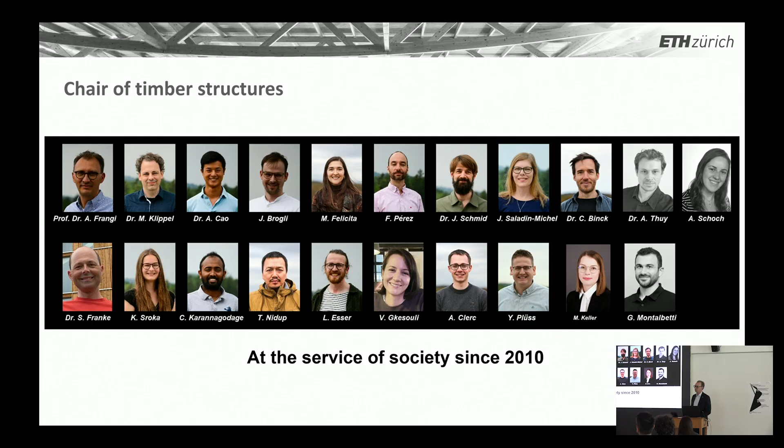I have some time to count the people. We are 21 at the moment, with 12 PhD students, and the chair was founded in 2010. We started with few people, as usual, with 4 people for a PhD student. And you see now in the last year we are around 20 people. So it's already a big group, as you can imagine, with PhD students, postdocs, and support also from some colleagues from Empa. I think it was able until now to manage the group.

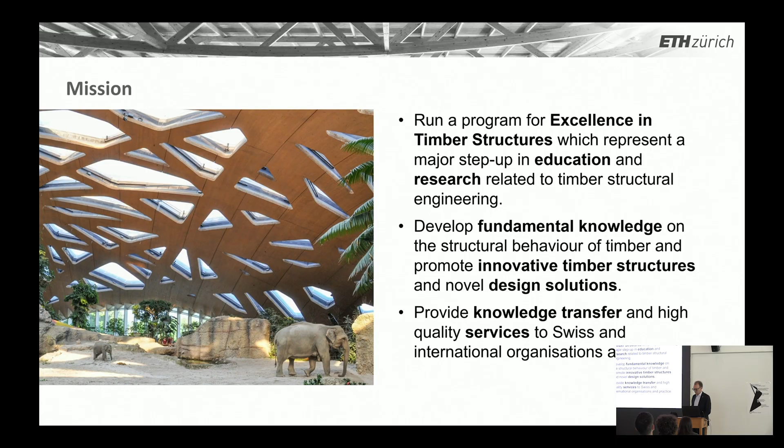I think this also shows timber is becoming important. The mission is very simple, of course: we are at ETH, we want to educate our students for the highest level in timber structural engineering, but of course also to develop fundamental knowledge, more in the basic research, but also innovative structures in the applied research, and also my involvement in standardization. I think it's also important to transfer this knowledge to codes, to standards, and to help the industry with consultancy and solutions.

In education, when I was studying at ETH, going back to 1995, there was only one lecture on timber. Now we are doing at least 3 times more. We teach at the master level at the Department of Civil, Environmental and Geomatics Engineering, offering Timber Structures 1, 2, 3. We also have fire safety and acoustic engineering, which is offered in the Master of Integrated Building Systems. We offer project work, master thesis, and building structures with timber. It's another lecture I'm doing, and maybe you know I'm from Ticino.

I'm happy to still be there 6 times per year at the academy teaching steel and timber structures. I have to say it's difficult to know if this is many or not many. I can tell you when we had 24 master students in one semester, it took 2 full days. But you can imagine, we don't have 300 students, we have maybe 60 students. And if 20 are choosing the master, it's probably because many people say they want to do the master because we are doing timber, so they are really attracted by the material timber.

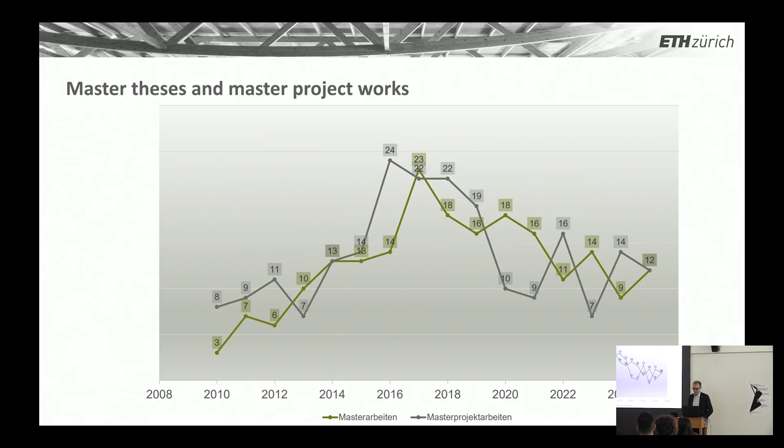During this period there was maybe also the change from Peter Marti to Walter Kaufmann, Fontana, Taras - so this big group became a little smaller, and we profited a little from this particular situation. We have 3 pillars: basic research, applied research, and fire. I will try to go through these 3 pillars and show you what we have done. This is our history - actually, usually for me this is the most important slide, because what I show you is the work of these people, it's not my work.

We were able to finish from 2010 up to now 27 PhD works in different areas. You see the colors showing you in which area - basic research, applied research, and fire safety. Of course, it's nice if some of these students are now professors in some other university.

Most of the other doctors are working in engineering offices. Most of them are here in Zurich. Probably most of them were here during the contact treffen today, trying to recruit possible engineers.

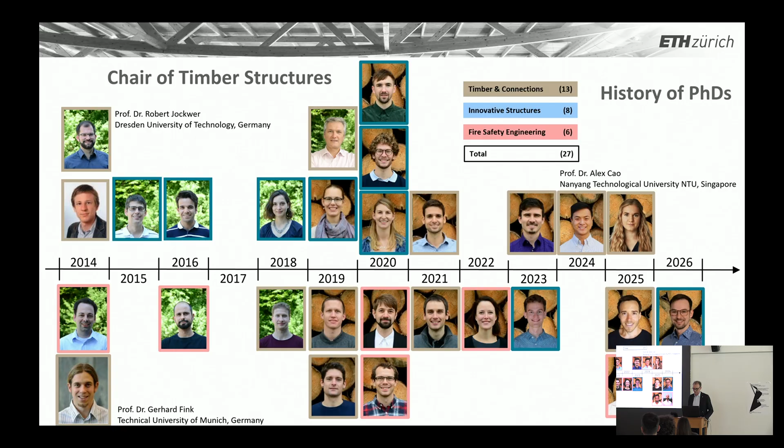Yes, I start with fire safety because, of course, fire safety was the main killer criteria. We were not able to build timber buildings due to the fire safety regulation. This was recognized also by the timber industry.

And now you see Mario Fontana here. He was professor at ETH from 92 to 2019. And he started in 92 what we call the fire safety research at ETH.

Now you see here, I was the second PhD student by Mario Fontana, from 95 to 2001, the first one doing the PhD in the area of fire and timber.

And then there were two PhDs by Mario, and then from here are my PhDs, when I took over the fire safety from Mario. What we have done is just burning - we have tested all possible wall elements, floor elements.

We have done this kind of compartment fire test. This was just important to get the knowledge and to bring the knowledge also to calculation models. And then, of course, to do this together with the industry.

But the most important thing in all this process, the Fire Safety Authority was directly involved. At the end, this was just to build up a trust between industry, authority, and the institute involved.

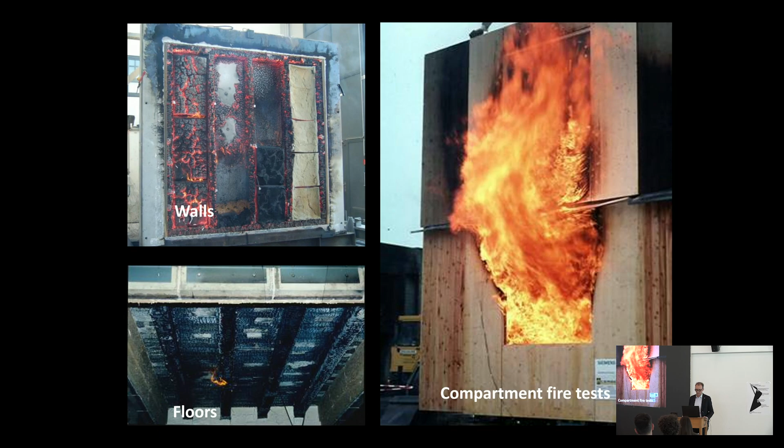And of course we focus on different topics - the topic of what is the influence of the adhesive. Here, this was Michael Klippel's thesis.

Miriam Kleinhenz focused more on the CLT panel with the beam. Pedro Palma - we always have to combine element with connection, the fire resistance of connection.

Reto Fahrni was the first person doing really a code calibration for the new Eurocode for the design of timber in fire. And I mean all this work, not only done here at IBK but worldwide, was very important.

Maybe you know the revolution in the timber industry is dated 1st January 2005, when the new regulation allowed going from 2-story to 6-story buildings. So really going to medium-rise building.

And now with the current regulation from 2015, there are no more limits actually for timber. And for the new one coming in 27, the situation will remain the same. From the fire safety regulation, we have the best one worldwide.

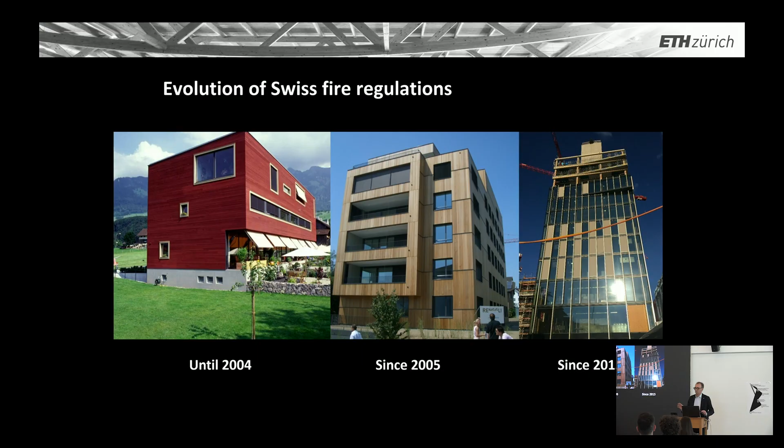You can do what you want, actually. So, but we have to do the right things, of course. But now you see in Switzerland we have 20 years of medium-rise building.

This is really, and it's not the chalet in the mountain, it's also in the city of Zürich, Winterthur, Basel, everywhere - now you see this kind of building.

I think for me, state of the art, honestly this kind of building we should do more or less in hybrid or in timber. It's really what we can do easily.

There are the first crossing timber bridges in Switzerland. And maybe you know that the new dock at the airport will be also done with timber.

So in 2030, when you land in Zurich, let's see what's happened in the next years, but theoretically there will be also a new airport made in timber.

I think actually it is a nice period. But this kind of structure opens also very important questions.

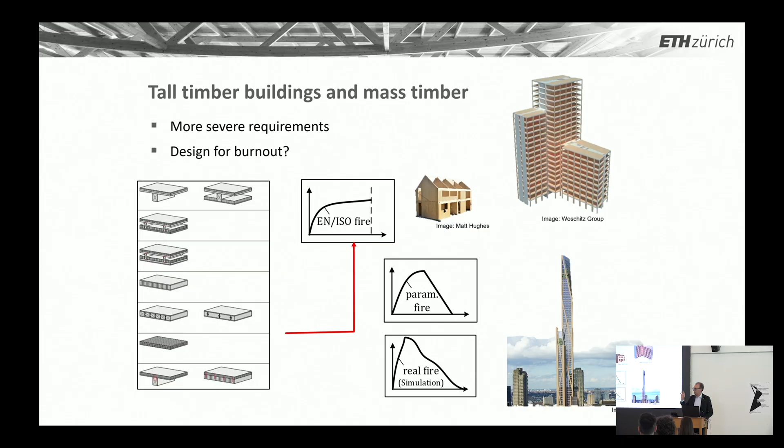Is not anymore the single family house. When we are doing tall buildings with timber, there were important questions about should we really stay with the framework of fire resistance, or do we have to go even a step forward.

And actually already 26 years ago we recognized, when you do a fire test with a compartment where everything is made of timber, in comparison to a compartment where you protect timber with gypsum plasterboard, the photos show that the fire dynamics is completely different.

Here we have much more combustible material. The flaming outside is much higher, is stronger. So of course, everyone knows if I put more combustible material, we change the fire dynamics.

And this is done also now worldwide, many tests asking for maybe new solutions.

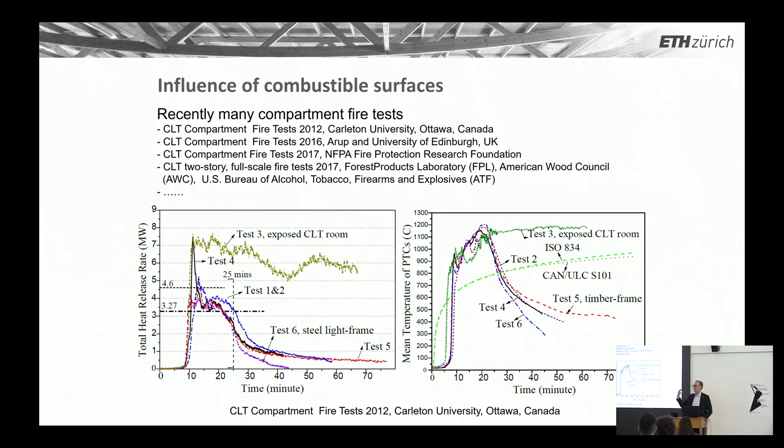And this is now where we are working in the last years, especially with the PhDs of Jochen Schmidt and Fernando, where we focus really on the real fire behavior. We developed this special device.

At the same time, we can play with the most important other parameter, temperature and air - how much air we bring to the timber surface. You know, if you want to accelerate a chimney, you just start blowing air and so on. Air is an important parameter.

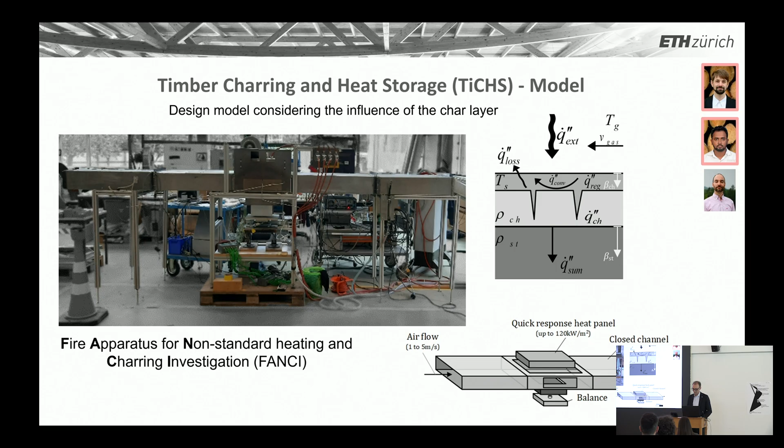Now Jochen Schmidt developed this TiCHS model, the timber charring and heat storage model. It's the first time we have a model able to consider the influence of the additional CLT element, but also the positive influence of the char layer.

Usually we focus on the timber because it's our load-bearing element. But the char layer is so important because it's protecting the timber, and the char layer, you see, is like a battery - it can store heat. This is the reason we are using charring for the barbecue. It takes the heat and gives us the heat over many hours.

Now we want to understand better how much heat we can store in the char. But then there is another issue, also studied by Schmidt: the char is combusted during the fire, especially in the cooling phase. When you introduce fresh air, you start oxidizing, and the char starts disappearing - meaning that in this phase it is storing heat, but later on it is releasing heat.

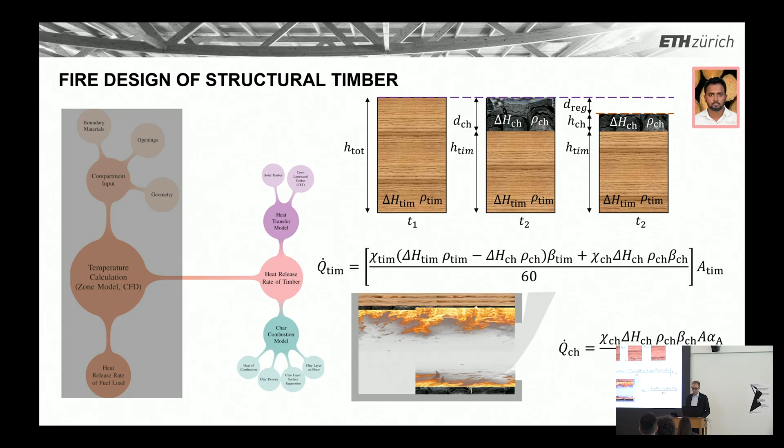So now we have the possibility to model the storage of heat in the char, but also, especially in the cooling phase, the release of heat due to the combustion of the char layer. We also extend the model with the so-called falling off, where the char combusts on the floor and releases more heat, and we are able to estimate this contribution too.

We are lucky that now we have a fantastic device here at ETH, the fire simulator. After the fire lab at EMPA was closed, it was a disaster for us, but we were able to get this new device here at ETH.

It's small, 1 meter by 2 meter, but it's designed so that we can even do this kind of bending test with glulam beam. The most important feature of the fire simulator is that we can simulate any kind of temperature development - this is why we call it a simulator, not a normal furnace - and we can also adjust the oxygen content.

So we can really simulate a real fire: at the beginning, when you have the so-called flashover - everyone knows what flashover is after Crans-Montana - when the whole compartment is burning, usually you don't have any more oxygen. In the cooling phase, we bring more oxygen, and we change the fire dynamics. We can really simulate this kind of real scenario in the fire simulator, so I think we now have the best device to continue the research.

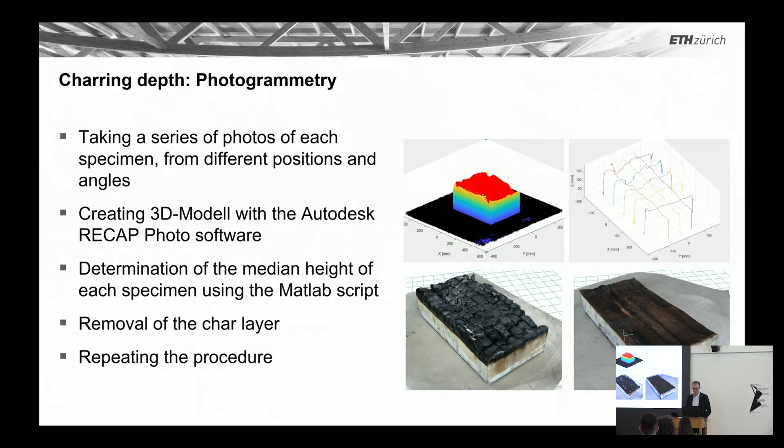And now, with your help, we replace, as far as I know, Photos, Recap, and MATLAB with the Artec Leo 3D software, and you get this kind of image. This is amazing - in my time, I was only able to cut a beam and get maybe 3 cross-sections. Now I have the full picture of the beam, of the plate. You can imagine what we can do nowadays.

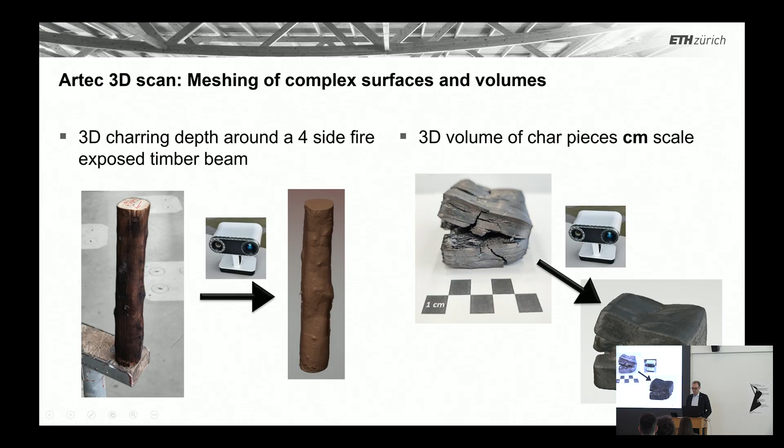Fernando Perez was not only interested in the residual cross-section, he is doing tests with small pieces of char, characterizing the thermal property of the char layer. You cannot believe how accurate this image is compared to reality.

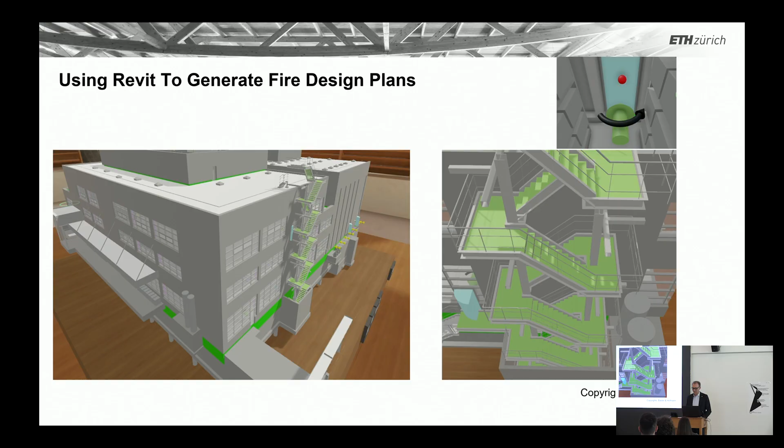Jamit was also helping, but this is more a side project with Bastler Hoffman, using Revit to generate fire design plans. I think this is also the future - to check the fire safety plan, to check the evacuation is now so easy. It's all new for me, but I think it's very fascinating, because you can theoretically simulate and really see if evacuation would work as expected, by drawing to the plan.

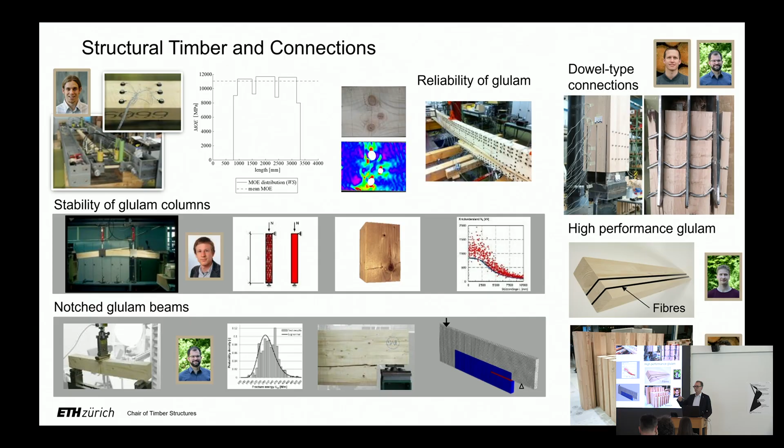Going to the basic research, at the beginning we focused more on glulam. It was more about grading better the material, characterization of the material. There was the topic about stability, the topic about beams with notches, and so on. These are typical basic research topics: improving calculation models, going to SIA standards, Eurocode.

But nowadays we are moving more from designing element by element, beam, column, to this system-based design concept. We consider the whole structure. And for this, we introduce more this scale approach.

So we are looking at the problem going from the material to the system, going through fastener, element, assembly. Of course, for each scale, we try to have a mechanical, physical model. With this model, you can always propagate some uncertainty and connect the different scales.

I think this scale approach is very interesting to understand where we have the problem. Sometimes maybe we are focusing too much on one level and the problem is on another level, or vice versa. And sometimes we are doing something only because we have the instrument, we are strong in this field, but we are neglecting that the problem is at another level. Now we are trying to work in all projects using this scale approach.

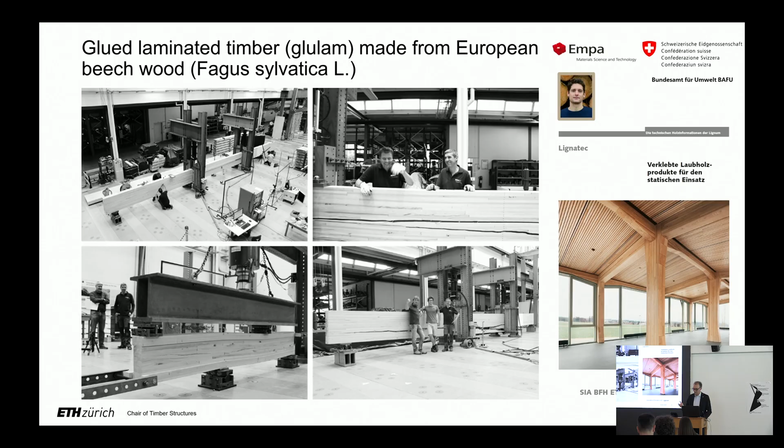Now we are building with softwood, mainly spruce, but we have an increase in hardwood too, especially beech in Switzerland. Some years ago we got funding from BAFU, and we have done a lot of research in hardwood, developing glulam made of beech, also ash, from Ticino even chestnut.

It's always beam and connection, because without connection you cannot do anything. Here you see the typical connection with slotted steel plates and dowels. This connection also works in beech, but we have to design it in a different way.

Then there is our super beech, the LVL, laminated veneer lumber. This product has fantastic properties. It's like our C200 for concrete, or S1000 for steel, because we go from 30 megapascal to 80 megapascal strength.

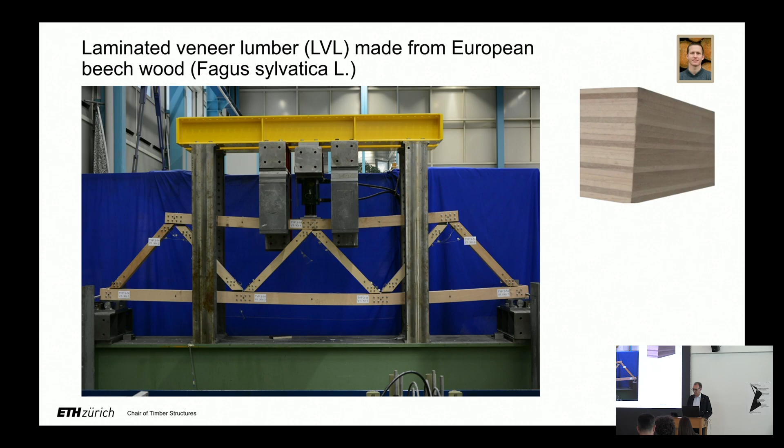And for this material, we have done also some interesting research. We are also trying sometimes to solve the problem of timber as a natural material by introducing fiber. It's always a dilemma. We introduce fiber, yes, we improve something, but maybe we are not so good with other things. But having fiber, you can solve the problem of the knot on the tensile side. The tensile side is not anymore governing.

You can even have a ductile behavior, so a beam which would fail brittle, with fiber is behaving more or less like a steel beam, because then you create the failure first on the compressive side, and timber in compression still gives some ductility. But of course, we have to introduce some fiber.

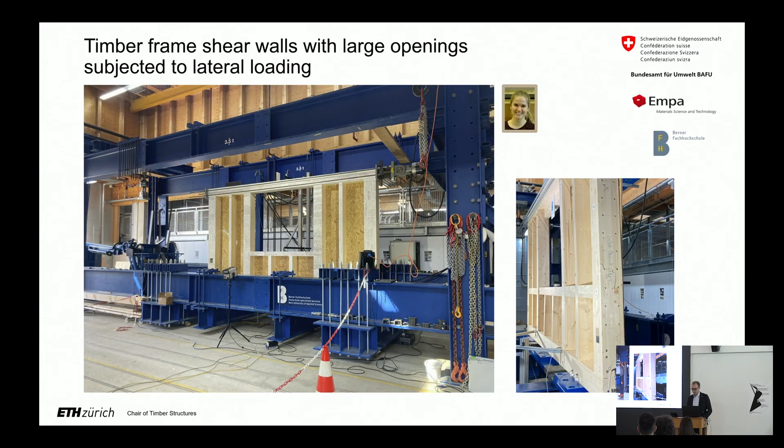You will see later on some other applications. This is one of the last projects that we finished, a typical project together with industry. There is this kind of light timber frame with openings, and there were no rules for designing with the opening, and now we provide this rule.

These are current projects funded by SNF. I would like to mention our first project together with Gramazio Kohler. You see the idea to build in the future this tower with CLT plates, any kind of folded structure. On our chair, the focus is more on the connection. On the chair of Gramazio Kohler, there are more interesting things in digitalization and so on. I think this is, of course, a very interesting project.

We are also discovering, again thanks to the collaboration with Gramazio Kohler and with CNC machines, that we are able to do more research in timber-to-timber connections. Without steel parts, there is a renaissance for this kind of connection, and we have a project ongoing.

This is something special, maybe something unique. We have a PhD student coming from Bhutan. Bhutan is a country with 70% forest, and they are not using any of it, just taking some logs and bringing them to India. Now Chewan is trying to develop simple grading rules just to be able to characterize the material of Bhutan, and of course in the future they would like to use the material instead of just cutting trees and exporting them to other countries.

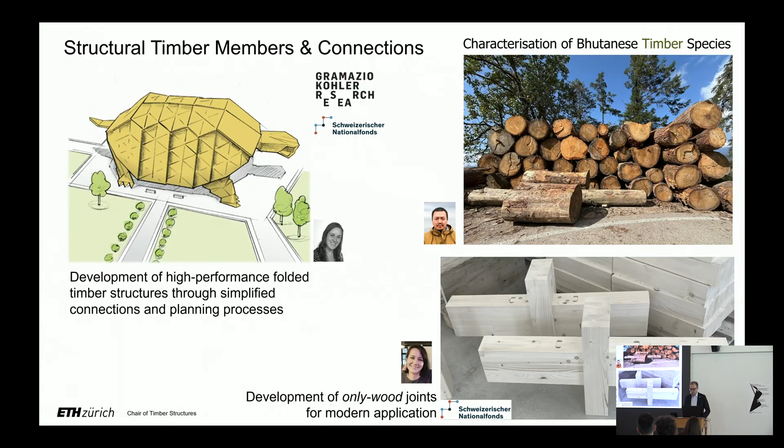Now moving to the applied research, what we call the innovative timber structure. Usually our most projects are industry projects, together with industry. We go to industry because we have an idea, or industry comes to us with an idea, asking can you help us?

Yes, this is already one of the first projects, the post-tension timber frame solution. It's a very simple idea.

You have a continuous column, and two beams which are connected to the column just because you have a post-tension cable going through. Of course, we have done many tests. It works really nicely. It's a self-centering system. You don't need an additional steel element.

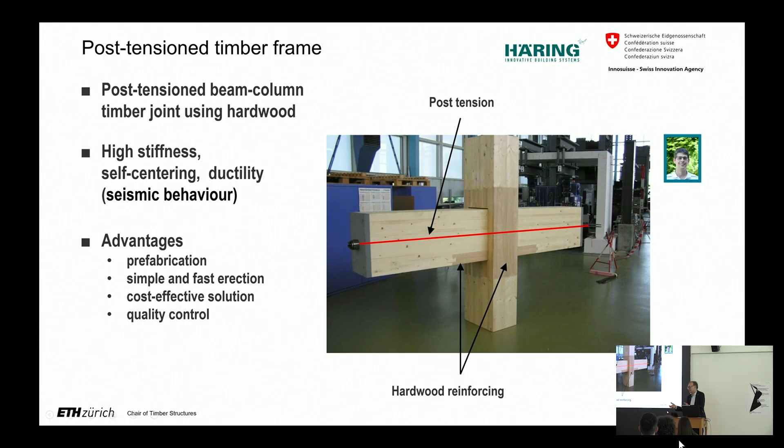Of course, now we have the problem that the column is loaded perpendicular to the grain. What we do is switch from softwood, this is spruce, to hardwood, beech or ash. We just take a material which has better mechanical properties.

We simulate a typical earthquake in Italy. So the frame is just shaking, and after the seismic event it goes back to the original position. The idea is not for Switzerland, we don't have really high seismicity, but it's maybe interesting also for other countries. For us the idea was to have a beam column connection without steel, just a post-tension cable going through.

Then with the beech LVL, we developed this timber concrete composite. This was more like a present for the concrete industry. They always need formwork. We say take this 4 centimeter beech, but this is also replacing the steel reinforcement in the concrete.

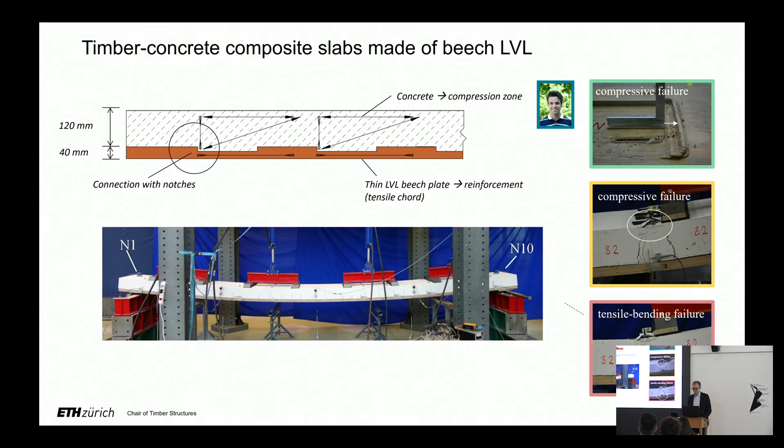And luckily, we were able to build the House of Natural Resources. It's now 11 years ago, inauguration 2015, built around 2012 up to 2015. You see also other professorships involved, Ingo Burgert, Arno Schlüter, Eleni Chatzi. And I really think, of course now we have Arch_Tec_Lab, but it's a small, nice building.

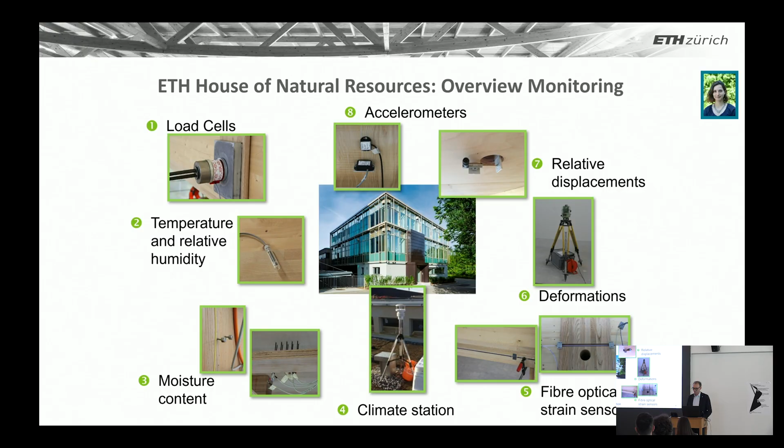Probably it's the first real living lab that we have built at the campus, because we have built new technology. Nobody has done this previously, and of course we are measuring everything for the last 11 years. So we know everything. It's not that we are measuring many things because the building is performing poorly, but still we were able to do something unique, thanks also to ETH.

So doing tests during the construction phase, of course it's about dynamic behavior and so on. Jumping on the slab, shaking with the shaker, with the hammer. And the unique thing we were able to even do in the different construction phases - only the frame plus floor, and the finished building. That was only possible because, of course, ETH was allowing us.

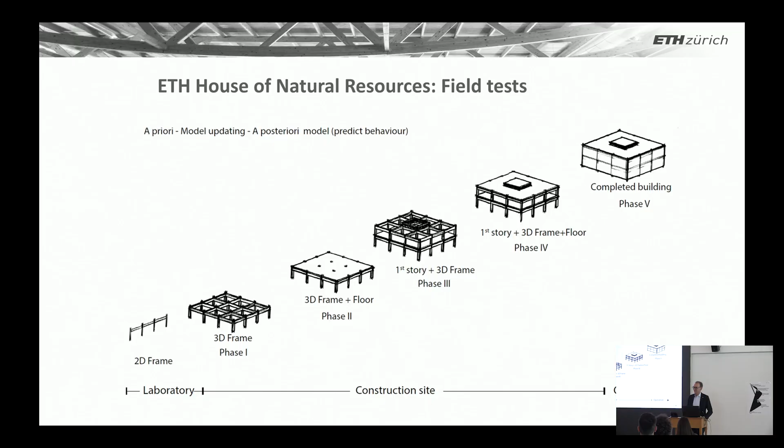And of course we hope that now with the living lab, the next one in Ile, we can repeat this. Of course, it's not 20 meter by 20 meter, it's a little larger, but I think it's a unique opportunity also to compare the numerical model with real things.

And what we have, for example, is 11 years of data on the post-tension force, because this building has a post-tension frame. Now we know that after 11 years, we lost around 15% maximum of the post-tension force. And we are very happy because it seems that now we are reaching a plateau. We don't have to re-post-tension the cable. We are really in a very good situation.

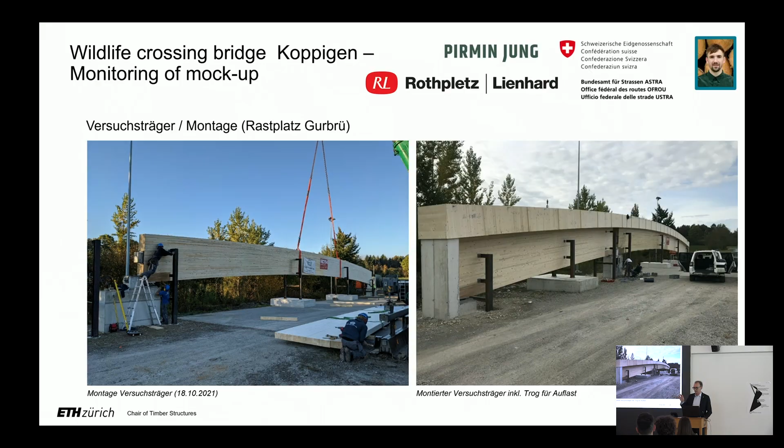Post-tension, for me, is very interesting, especially for large spans. Here you see a project for this crossing wild bridge in Koppigen. Now it's finished, and Astra allowed us to really test in a mock-up, 1-to-1, this composite beam with the post-tension, just to be sure that it worked later on. It was a very nice small project. We have been actually supporting especially the engineers.

And another one is for the new sport centrum in Oerlikon here in the city of Zurich. There are again very loaded glulam beams, 46 meter span, and in order to meet the requirements, the deformation and so on, it is planned to have a post-tension cable. We have done different tests for the engineers just to give them more knowledge.

We are doing a lot of timber in combination with other materials. My PhD was on timber concrete composite, so it's normal that I have this kind of combination also in my background. And here you see now what we call the micro notches, developed by Katharina Müller. It's very easy, you cut not deep notches, very thin, only 4 millimeter notches. It's like a shark - you see, the company called it a shark, not micro notches.

But it's enough, this interlocking, to transfer the shear force. And we are very proud - Katharina is now implementing the slab with a small spin-off, and she's doing many square meters. So it's the best what we can do at ETH: develop something, and young people are bringing this into the market.

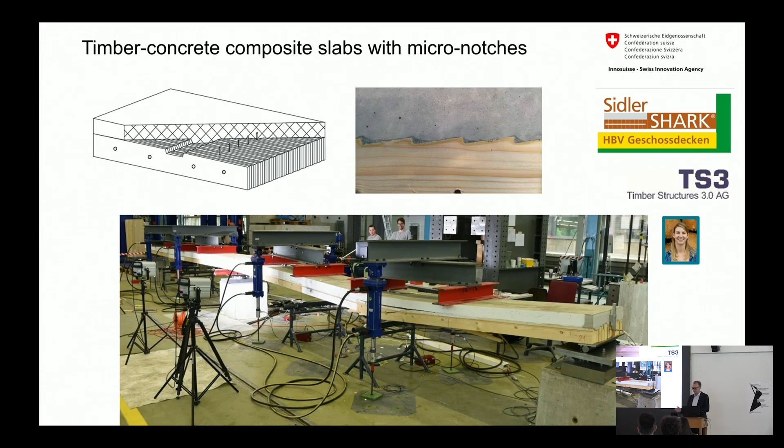We have developed also a glued solution. It's always a delicate topic, should we glue concrete with timber? This was done together with Sika, with Ingo Burgert, EMPA ETH, with Fagus.

It worked. We are able even to have a glued solution. Of course, you have the best connection in terms of stiffness, but maybe we are losing all the possibility of ductility. For the ZWAT building, because in ZWAT building there are timber concrete composite with the beech and the concrete.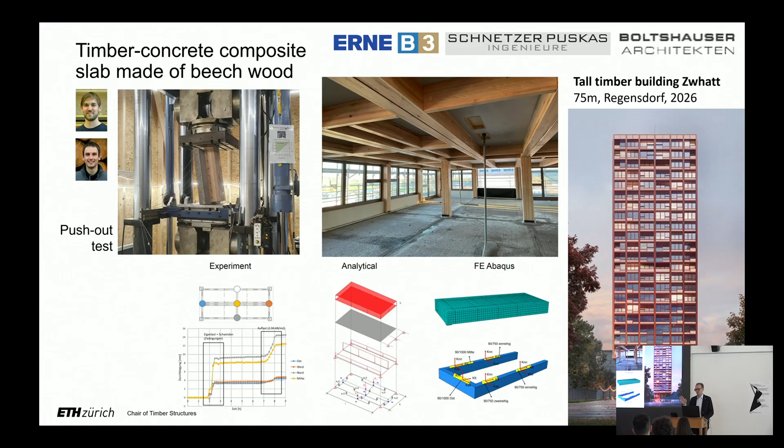This was also a premiere. Usually Erne is using softwood, spruce, and because they switched to Stabschichtholz in Buche, the beech Fagus product, we have done the characterization with push-out tests. We have also a mock-up. By switching from softwood to beech, but keeping the same rules for softwood, you are usually on the safe side, and we are on the safe side. But in the future, we can even use more.

Timber Structures 3.0 is the crazy idea to glue the CLT plate in this way. Nobody was believing it is possible. After 20 years of research, it worked. It's also a company on the market now, and they are doing many projects.

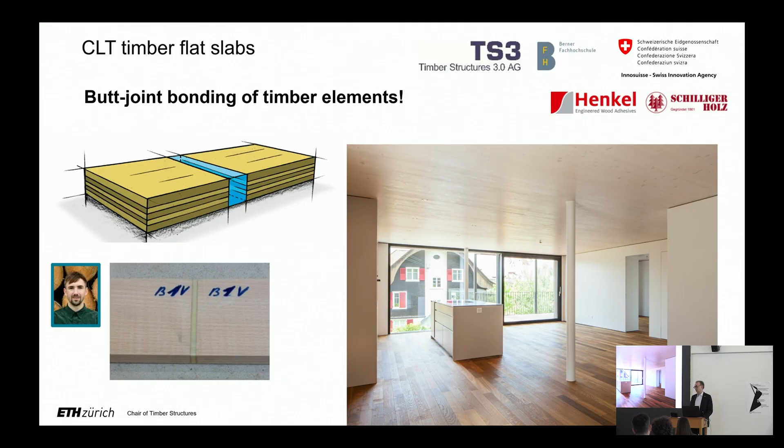CLT is using a lot of wood. We always say we should actually use less wood, build more with less wood. This is the reason that in a follow-up project, we try to replace the CLT with a hollow core flat slab - having a plate, a web, and a plate. These hollow core timber elements are much more sustainable because we use half the material. But of course, you need a company that is able to produce this. So at the moment CLT is the most important product, but I think in the future, probably we will also go back to this kind of product.

In another project, the timber concrete composite biaxial - these are pure timber elements working in two directions. In this project we also developed a timber concrete composite working in two directions. Usually timber works more unidirectionally, but I think in some situations it's really interesting to have this biaxial function, as you have with a normal steel reinforced concrete flat slab. It's more like a sandwich where you have a timber board, concrete on top, and then we need this steel cylinder to connect the element. Again, we are really using maybe 8 centimeters concrete, 6 centimeters timber - so we are using less material but having very high performance.

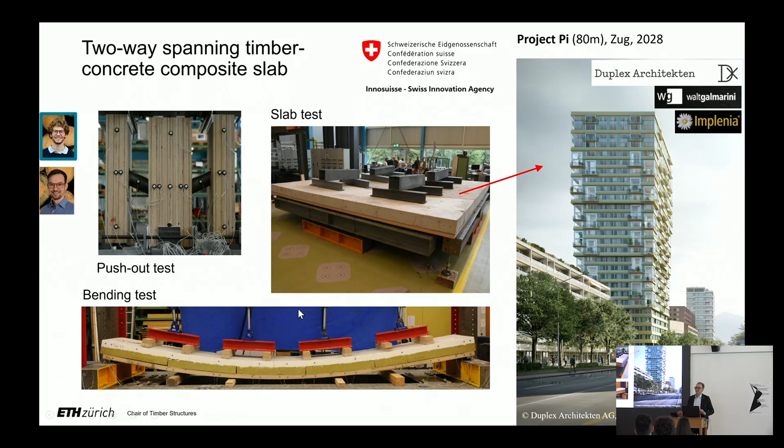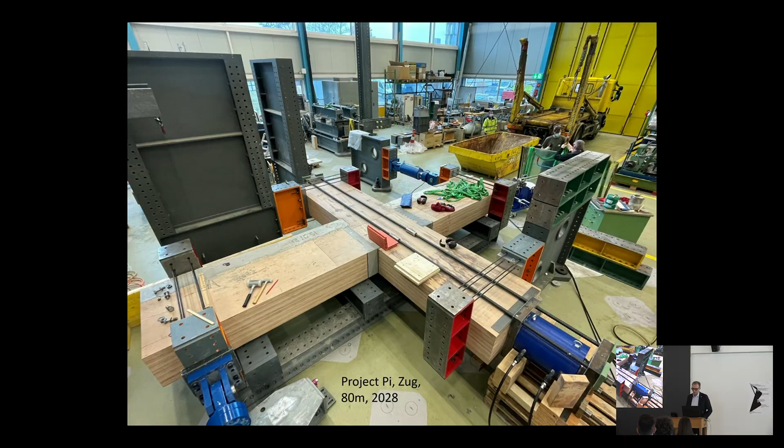If this Pi tower will be built, we still hope that our system will be implemented in the project. The Pi should actually be a lighthouse project because it will be a tube-in-tube system, a pure timber structure. We have also developed it together and done the test. It's a frame construction - beam, column, connecting together, moment resistance. This is the test in scale 1:1. If you want to build 80 meters, this is what you need. In beech LVL, it seems really able to go up to this height.

Now I have called another TCC. Currently with Erne, again, we are developing another timber concrete composite. For Erne, an amazing idea - they prefabricate a concrete element. You take the beam, you place the prefabricated concrete element, then you fill this gap. After 24 hours, the element is ready. I think it will work, but it's something very interesting.

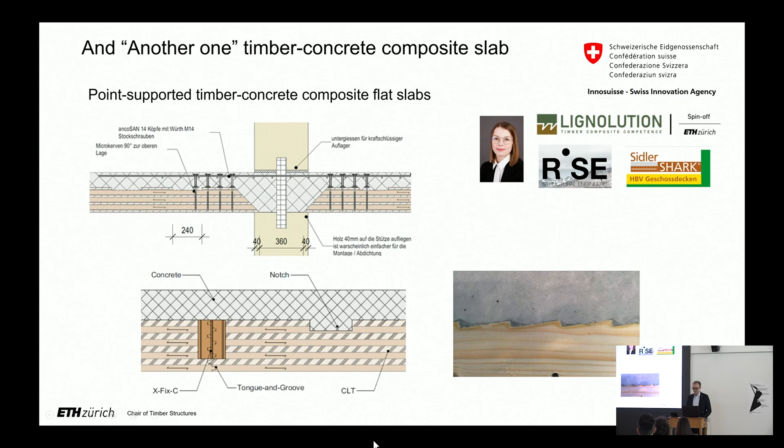And again, you see another one with another company, but this is more the CLT and concrete biaxial with the micro notches, however not with the deep notches. So I think that TCC will really be an interesting combination of these two materials.

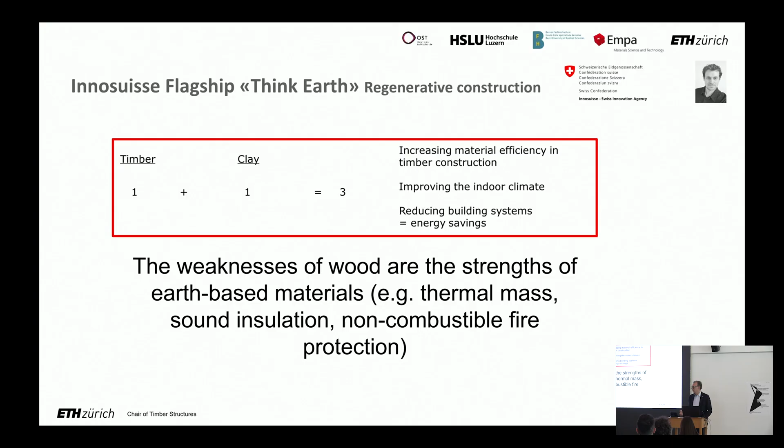Now I have to mention, because this is really a huge project, the Innosuisse flagship Think Earth, where we are trying to combine timber with clay. We invented this mathematical error - 1 + 1 is 3 - so we really think that by combining these two materials we have added value, and we can compensate especially the weak points of timber. We don't have thermal mass, sound insulation, or even fire safety with the clay. We have done the midterm review last week. After 2 years, I think the project is really running very well. We have actually 10 projects together, and some are more dedicated to the earth-based material, some more to timber, and then we combine the materials together. We will see in 3 years where we are.

Now, this tall timber building competition worldwide is, of course, interesting for us because each city wants to build 1 meter higher tall building.

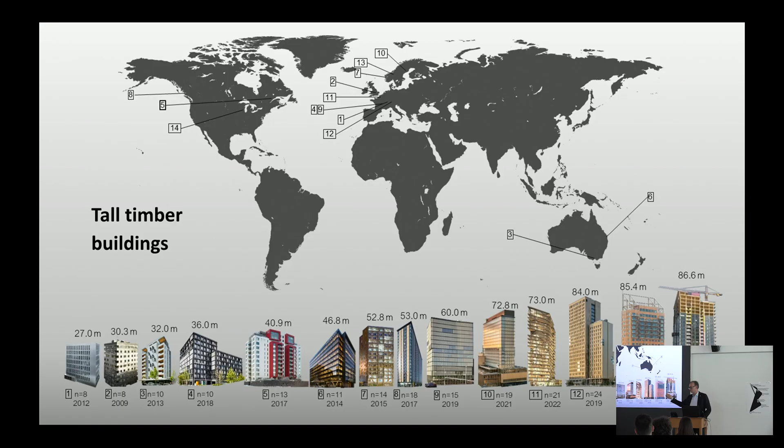This raises again more questions about stabilization, about robustness, and about moment resistant connections. With Aurélien, we have studied what height we can reach with a pure timber structure, whether a frame structure or a tube-in-tube structure, and now we are simulating a building with frame structure.

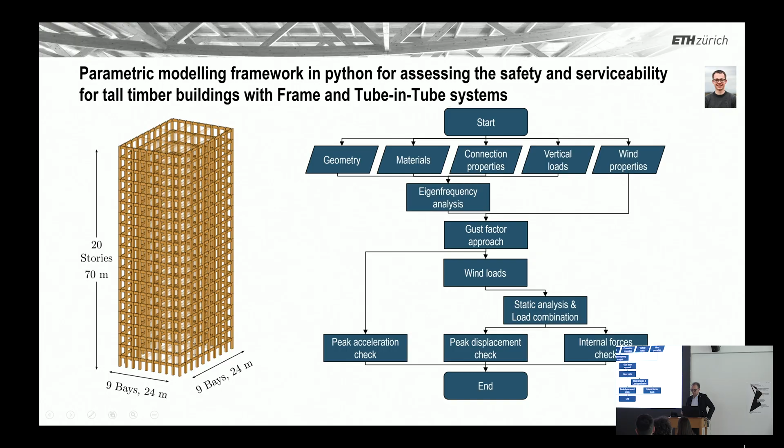For tall buildings, the governing factors are usually wind design, peak acceleration, and peak displacement, and structural safety is usually not so critical. We study different structural systems, the frame, the tube-in-tube system. Nowadays with supercomputers you can run 2,000 simulations per configuration, and now we understand which level we can reach - we think we can go up to 150 meters with a tube-in-tube system.

Especially, we know for the beam column connection what is the demand, what is the performance of the connection required for this kind of frame action.

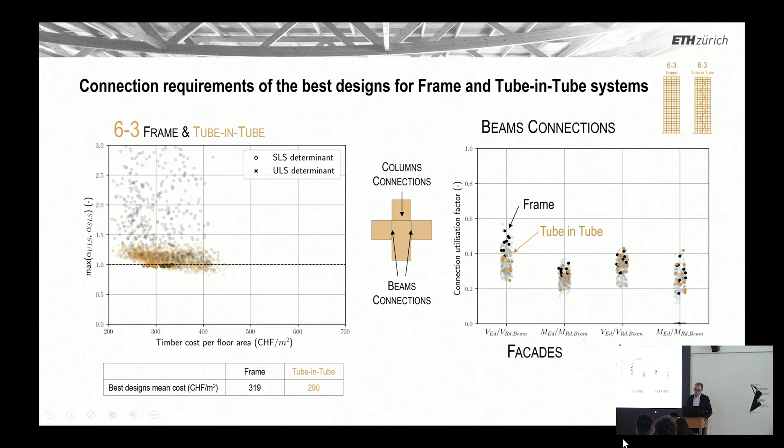The good thing is that this young student is happy to try other methods. Aurélien was training this autoencoder for the beam column connection with glued-in rods. First we developed the Abaqus model to check that when we have some input, we get the performance. Now we have a model to validate the autoencoder.

As far as I understand, you would go first in one direction, then the other. For me, it was amazing to see the autoencoder in comparison to the Abaqus, meaning we think the Abaqus is the right solution - of course, chapeau.

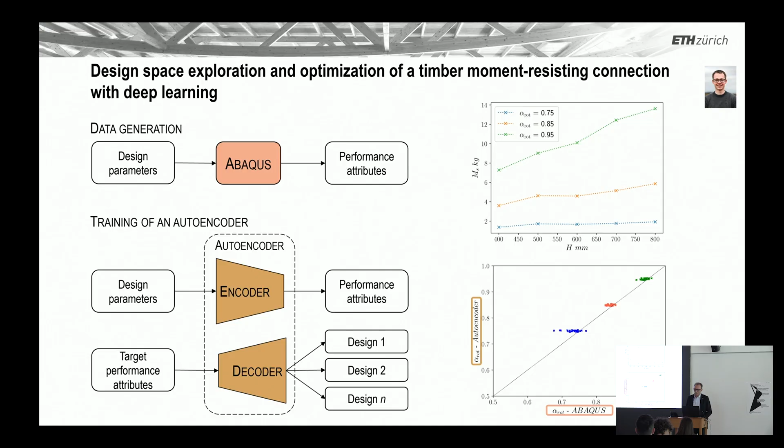That's very interesting. For us, it's really good now to take this new opportunity, because with timber you have so many uncertainties with the properties and so on, that this kind of tool allows us to be more efficient and at the end more reliable.

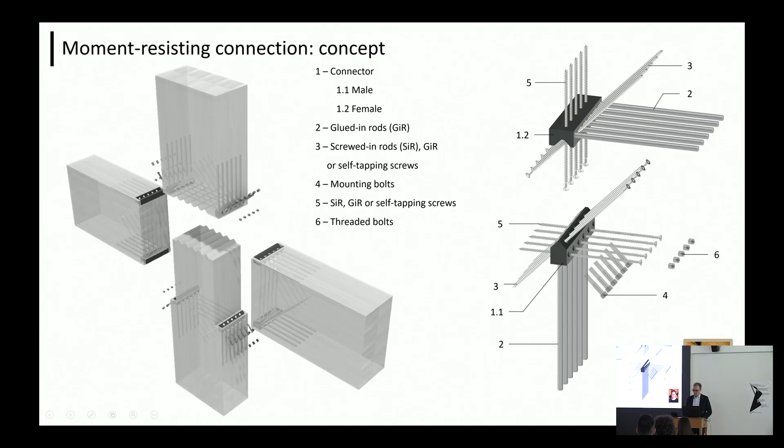Now we need this connection. Aurélien is developing one connection with ETH. One connection is finished - it's the work by Charles Binck. He developed this beam column connection with steel elements placed in the column and in the beam, connected together only with mounting bolts. With this idea you can create any kind of connection - the cross, the beam column, the portal, attaching a beam to another, or just beam to beam. It's just a brilliant idea.

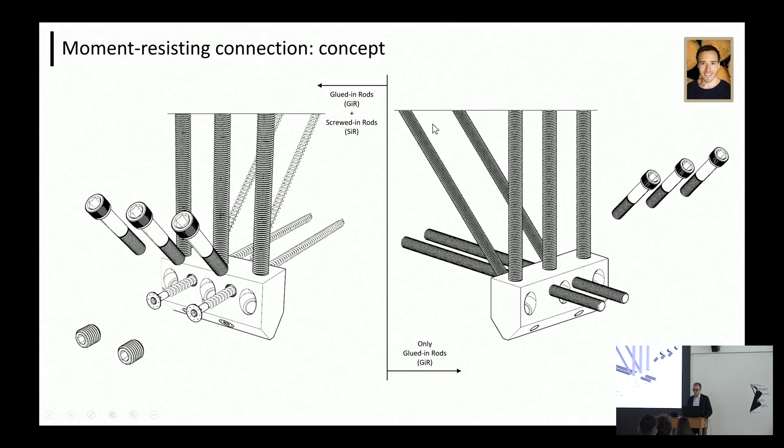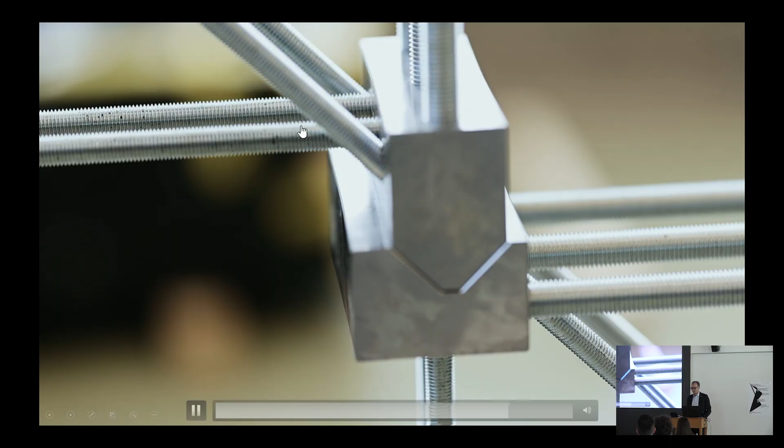You always have the connection to the timber with glued-in rods or screwed-in rods, and then you have two steel parts which match together, male, female, self-centering. You just bring your column, take your beam, place it, and at the end you have 3 or 6 mounting bolts and you connect them together.

Yes, Charles already finished the work. You see now the final test with the cross at scale 1:1, and we tested 2 different solutions. This one is even more performing. What we know is that this connection is able to - just look at this line - is the connection rigid? What we think does not exist.

If we would take steel and weld it together, yes, we would follow this line. But now with this connection, we have around 90% of the stiffness, which we know is more than enough. We have really a moment-resistant connection, which is even ductile in failure.

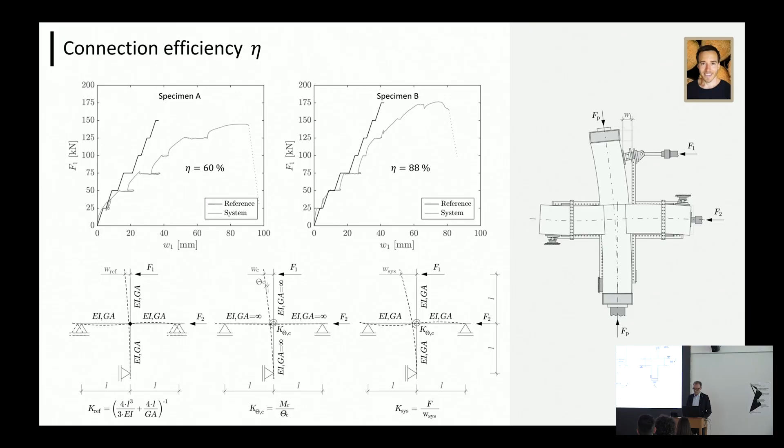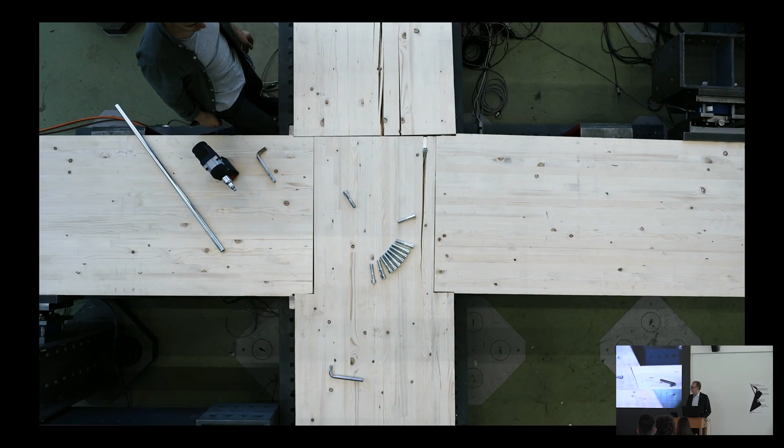But for me, amazing is what happened after he did the test. He destroyed the beam column, and in 5 minutes he was dismantling the element - just removing the bolts. Because now we are talking about circularity, reuse, dismantling. I don't want to say this is the solution, but I think it's an interesting one, because with this kind of connection, even in 15 years, you can dismantle your element easily.

Let's see - we are now trying to bring this to the market with a big company, not the red one, the other one. Let's see if we are able.

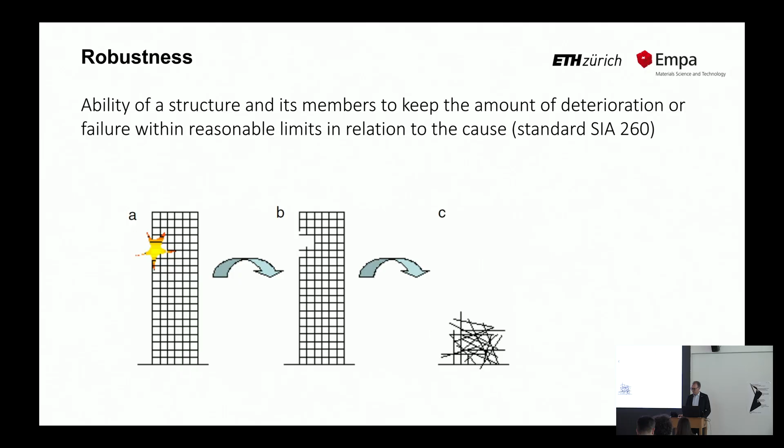But we are working on this topic, because timber is prefabrication - we just connect all elements together. It's not concrete, it's not monolithic, so we know that we are not so robust.

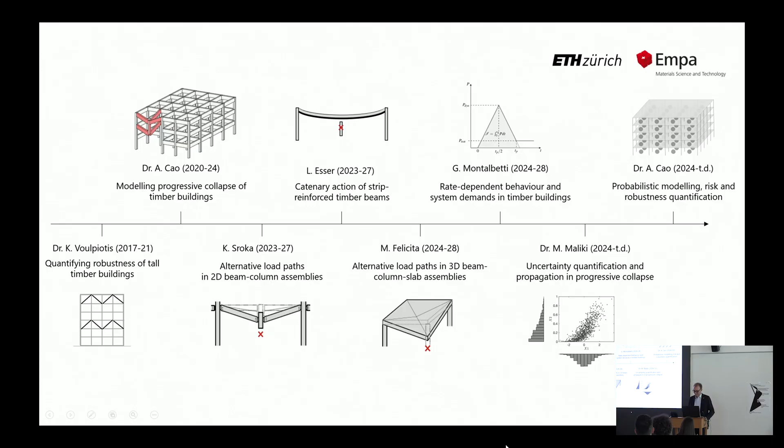We started 10 years ago. I was thinking, oh, we do one PhD, the problem is solved. We have finished 2 PhDs, we have 4 PhDs ongoing, and I still don't see the end of the problem, which is much more complex. Konstantinos has set up a framework - you see again the scale approach, going from material to the system, just to be sure where we have the problem of robustness, and at which level.

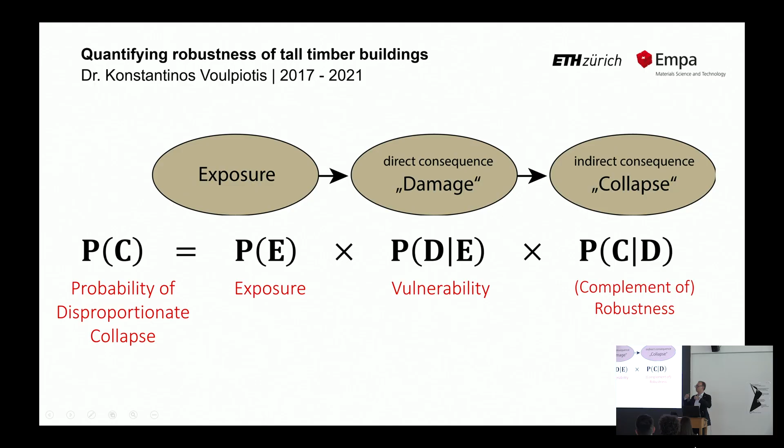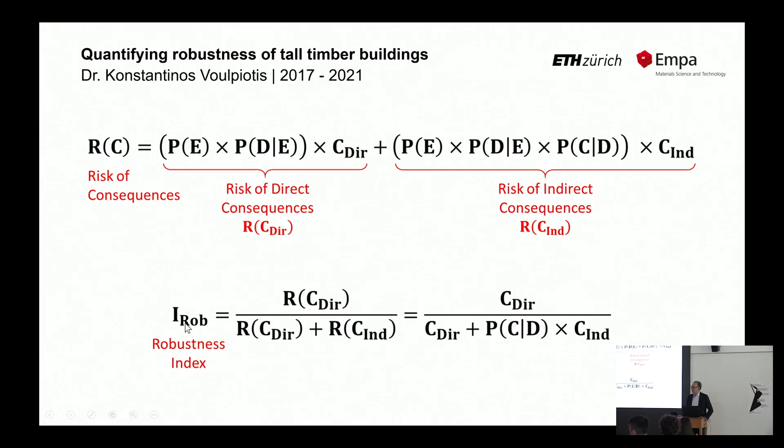Robustness, you can imagine, you have a probability that there is an exposure. This exposure can bring damage, and then we check if the damage brings to the collapse of the building. We can even quantify the robustness with the robustness index nowadays. So we have also some tools.

But of course now we need a model to start simulating a collapse of the building. We cannot build the building and try to see the progressive collapse, so we are going more to numerical simulation. Konstantinos has done the first step. Here we have the possibility to propagate many uncertainties through the model, and really try to evaluate how robust a measure is. It's always a question of when we are robust enough or not.

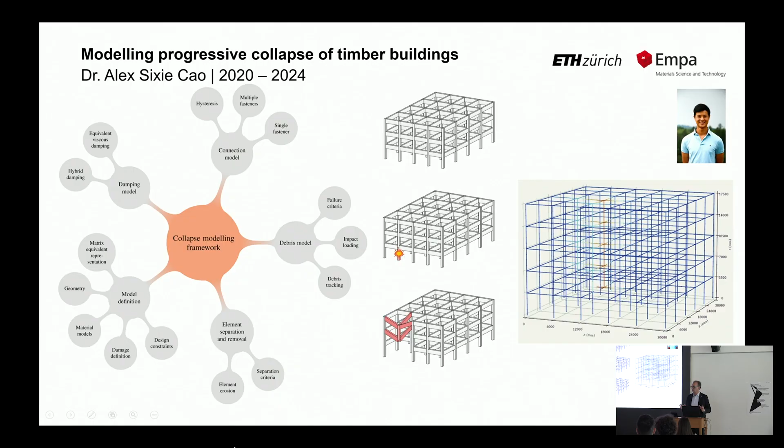But now with Alex Cao, PhD, he developed this collapse modeling framework with so many interesting features. We can even simulate elements which are failing, detaching, falling off and hitting other elements. So we are now really trying to have a super tool which is able to simulate a progressive collapse.

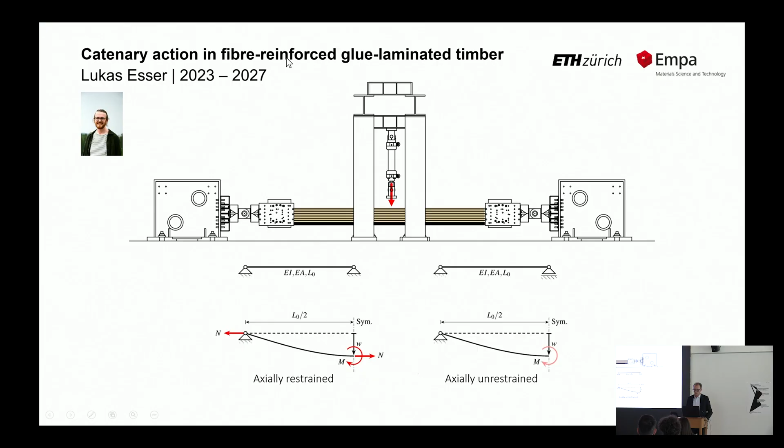That, of course, we have to validate with some tests. And some tests can be, for example, and we go back to the fiber. Now you see a glulam beam with fiber. Lukas Esser, what he's doing: if you take a simply supported beam and load it, you will have just a failure in bending. But if the beam is restrained at the end, we can activate the so-called catenary action, so you go from bending to tension. The problem is that usually in timber, before you go to the catenary action, you have the failure in bending.

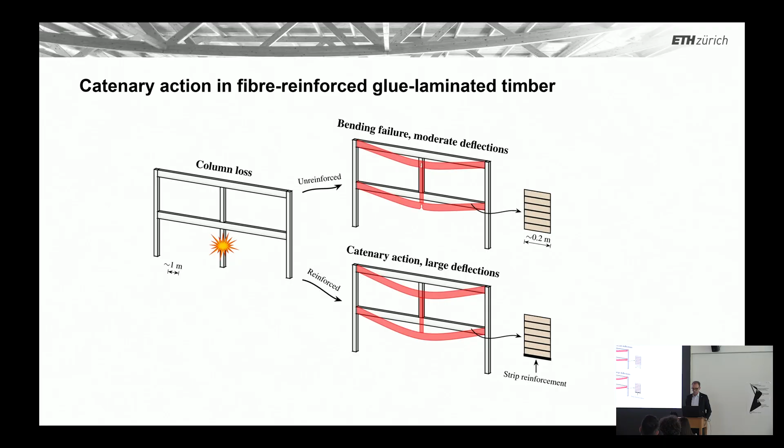And now we are saying, okay, then we go back to our fiber. The fiber reinforces the tensile side. We have done, again with Ingo Burgert, some small scale tests. It seems promising, and then we decide, let's go to the real large scale.

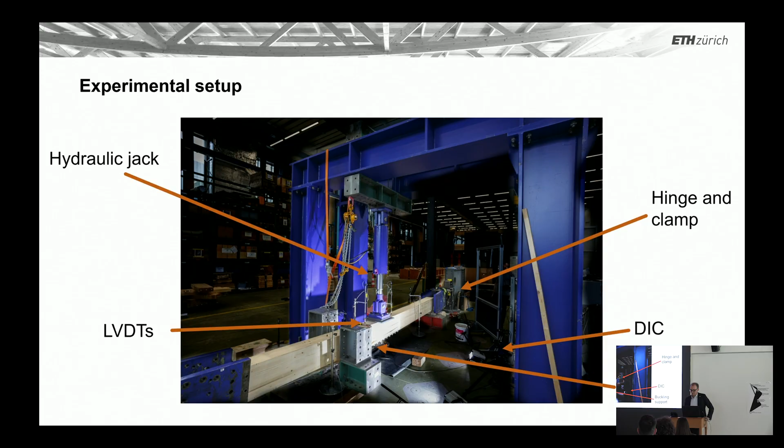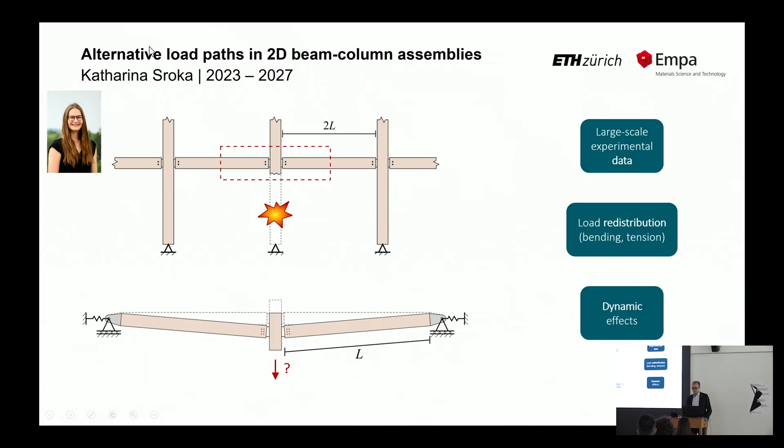Katharina Sroka is looking more at the connection. So the typical example: the column is failing, what happened in this connection. And here you see how we are doing the test, just pushing this connection, this part, and seeing how much we can really rotate the element. It is about, okay, ductility of the connection. You see large deformation, you see also large rotation.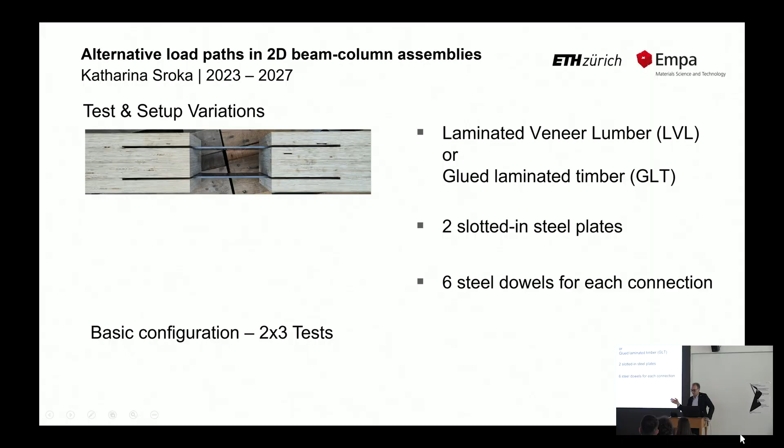We have done now different tests with LVL, which is a homogeneous material, and with glulam. Just to cut the story short, you see in this test, at the beginning we have a typical moment, but then by increasing the deformation, the moment is reduced and we activate really this axial force. So we were able to demonstrate also this catenary action in the joint connection, which is good if we are able to activate this catenary action.

Yes, we now have evidence that by activating catenary action, we can activate alternative load paths also in timber engineering. For steel and concrete it's usually easy to do this, and now we think there's also a possibility for timber engineering.

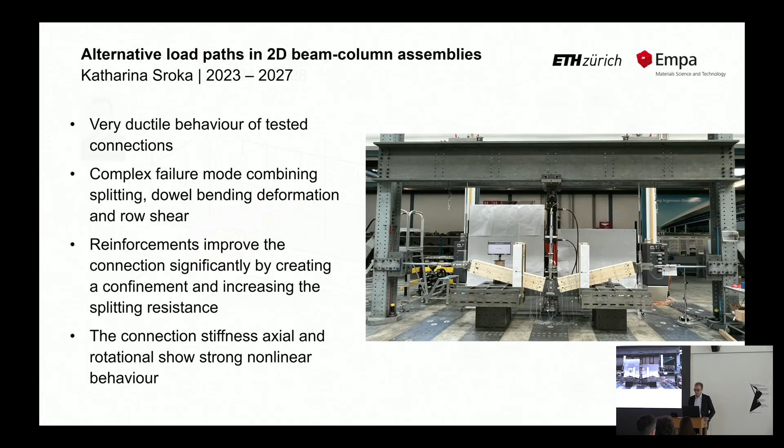I'll finish with Gioele Montalbetti, which is the last one taking care of, or started working on, this topic: collapse modeling, improving it by focusing on the rate-dependent behavior. When you have a car crashing into the column, you have a dynamic factor. This should show what happens when you have a car coming and not stopping.

Now, what is important for us? We know timber behaves in this way under quasi-static loading. If we increase the velocity of the impact, the strain rate, we have this dynamic effect: usually the stiffness is a little higher, but sometimes we assume the same stiffness, though we know we will get higher strength. The question is how much—is it 10% more? Is it 50% more?

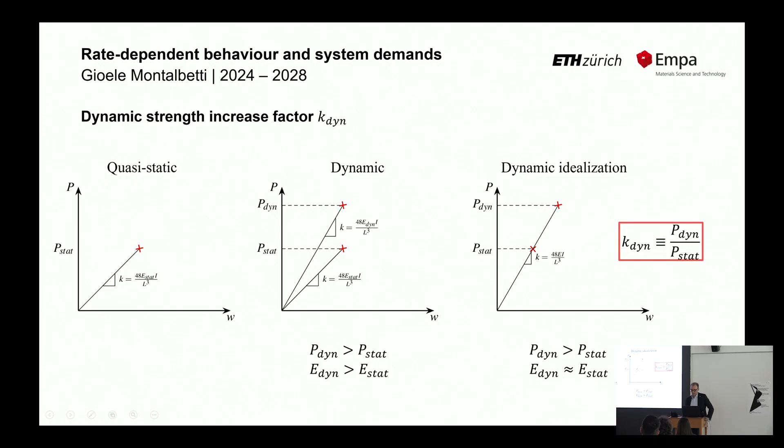Is 100% more? We are interested in this dynamic strength increase factor. For studying this, this was Alex, and then Gioele took over.

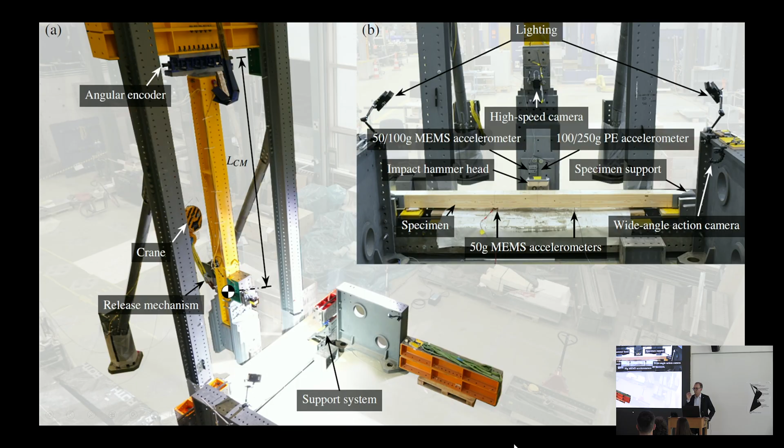We developed this pendulum test setup. It's around 4.5 meters high. Here you have 3.5 tons of steel. You have many devices, the most important being the high-speed camera, taking

6,500 pictures per second. And what we are doing is something that everyone studied in primary school with a pendulum, so an energy balance. You let the pendulum go, crashing into the timber, and without the timber it comes here, and with the timber it stopped here, and is going back. So we are able to calculate the energy released by the impact.

To calculate the force, we need the stiffness of the element, which we know, and we have to understand the displacement. What is this beam doing? And I think Gioele is amazing.

He's able to track the displacement of the beam by putting this ArUco marker on the beam. Then there is a reference point, and it's able to follow the beam, also because of the high-speed camera.

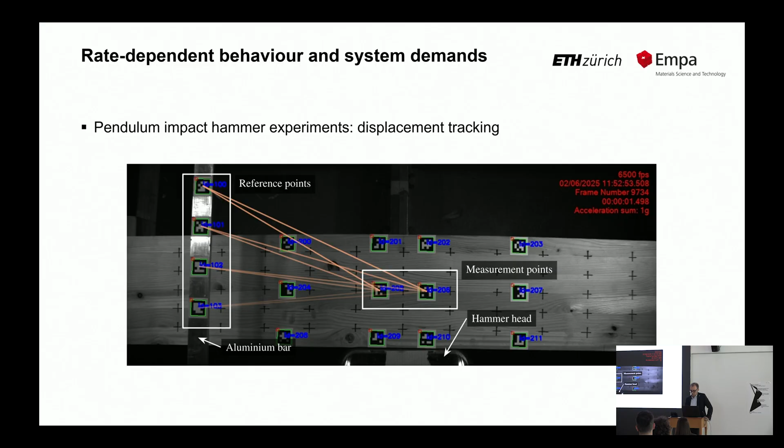And now by changing the angle where we start and also the length, we are able to do the test with different strain rates.

And the results, first I'll show you if it's working, maybe a pendulum test. It's not starting. Let's see if we start in this way. Yes.

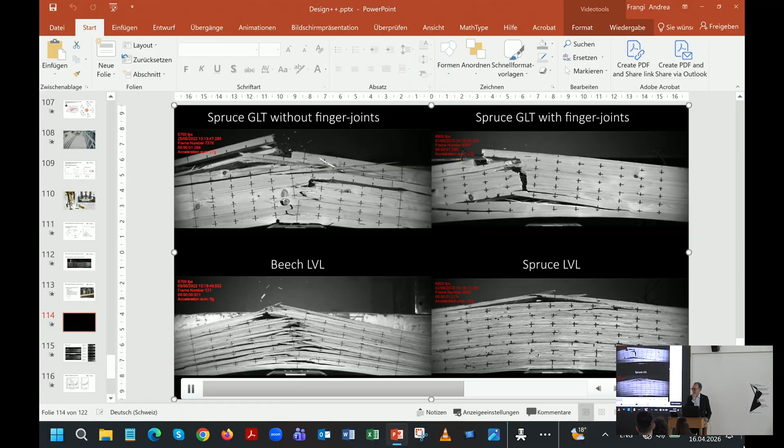So spectacular, yes, of course, the test is this. This is spectacular, what we see with the high-speed camera. That's incredible. You can spend hours, and of course, Gioele is spending hours.

And we are even able to characterize the different failure modes and quantify them. It's the last slide. So you see if it's a fiber failure or finger joint failure, usually it's a mix.

So I think it's really fantastic what we can do. And now we have the dynamic strength increase factor. We are able for the first time to quantify, with tests done at large scale, this factor. And based on the strain rate, we reach up to a factor of 2.

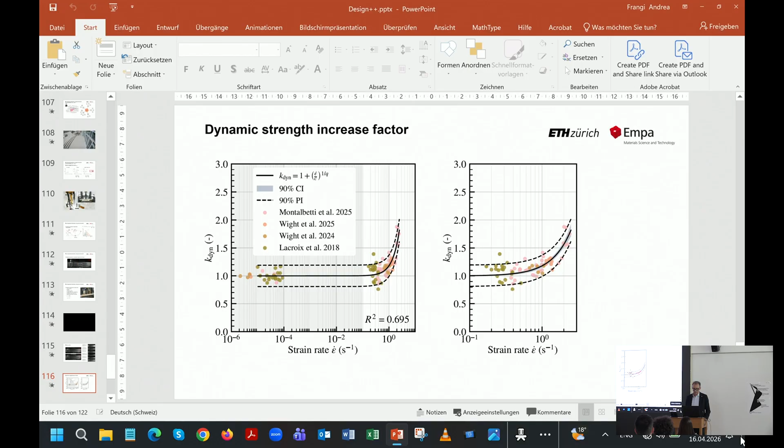With the pendulum, we are simulating something like a car crashing into a column, at 40 kilometers per hour. Yes, I think I'll skip this one.

This one, we still have many challenges, but we have many opportunities. I still have 10 years at ETH if everything goes well. So we will try to promote timber.

And the vision would be the Empire State of Wood. We would be happy if we do some more building with timber. Thank you very much for your attention.

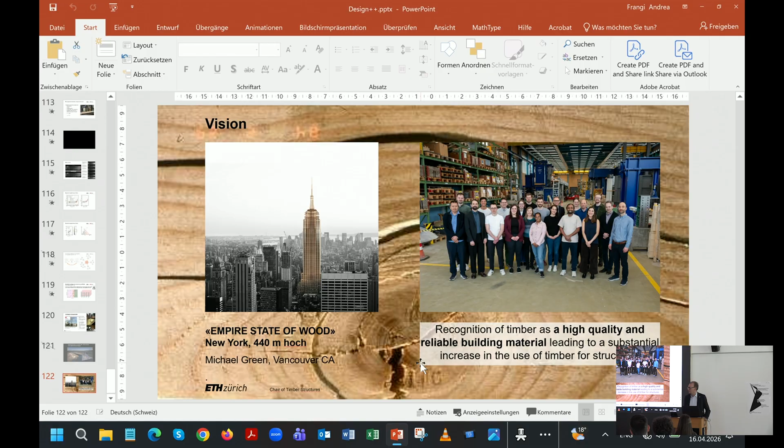And I told Fabio I would finish after 45 minutes. Now it's been 1 hour. Sorry to be so long. Thank you very much.

Thank you, Professor Frangi, for this excellent and comprehensive overview of the research in your chair. I think it's very instrumental in terms of pushing what's possible with wood structures.

So I would like to first open to questions, if there are any in the audience. So, okay, there are a few people. I'll start with you. Thank you very much for the presentation. I have a very small question.

Since you showed the glulam beam for the passage for the animals, and then there is a glulam beam, and below there is always like a hardwood glued below, and sometimes even a steel plate below, what is the key reason? Because fibers are crushing at the supports. How do you size those elements, like why this size, not bigger, not smaller? And the same for the Hilti connections as well, with small pieces of steel—how do you dimension those elements?

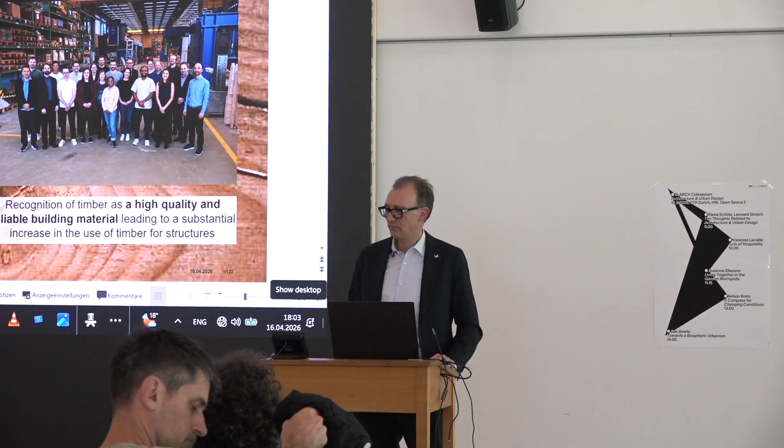And I have to say, thank you for saying most of them are in the market, yes, but there are also a few of them which die. That's the reality, that there was no real application at the moment. But because we are at ETH, we are very close to industry, so we always try to apply this innovation. And now you see the problem of timber engineering, the diversity. I mean, you have so many ideas, so many products, so many innovative things, and then the architect says, come on, what should I choose? But it's also amazing on one side, because it's good to have so many solutions.

But maybe in the future we have to go toward some standardization, reducing complexity. It's important, because at the end it's also a question of being economical. But each company wants to have a specialty just to be unique. This is a little the characterization at the moment of the timber industry. But when I say that in Switzerland we have the best companies, I really think for timber, together with Austria and south of Germany, you have really the best knowledge and the best companies. Maybe we can say the best education. We have all the ingredients, and we have investors who are happy to do something different.

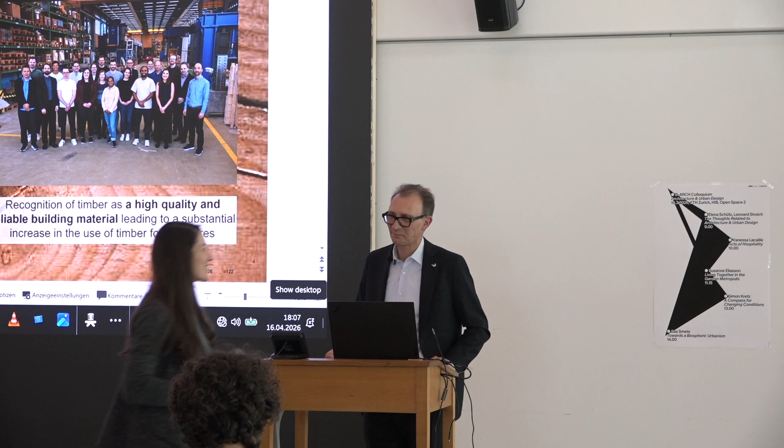Even if in Switzerland we are very liberal, in Germany and other countries this is really the problem, that you cannot do it because it's not in the code. But we want to still remain liberal in Switzerland, which is not so straightforward. But we will.

The structure system used in the Swatch tower is a tall building, it was never used before, it's the first time. You cannot do this in Germany, you cannot do it. Nobody will allow you to build a Swatch in Germany. Maybe with special individual approval, yes, but good luck, it's so complicated. In Switzerland, the architect, the engineer, and we do the test, we say it works, let's do it.